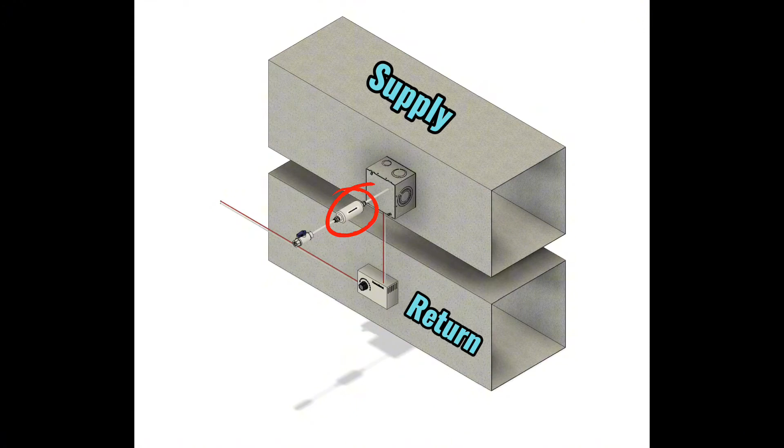You have your supply plenum here on top, your return plenum on the bottom, and this junction box houses a thermostat switch and a water solenoid valve, with the atomizing nozzle attached to that solenoid valve. On this water line we also have an inline water filter, generally a granular activated carbon type filter or a polyphosphate water conditioning filter, because you want to remove as much of the sediment and silt from the water that goes through that nozzle, since that nozzle has a very tiny orifice and can get clogged easily with calcium or mineral deposits.

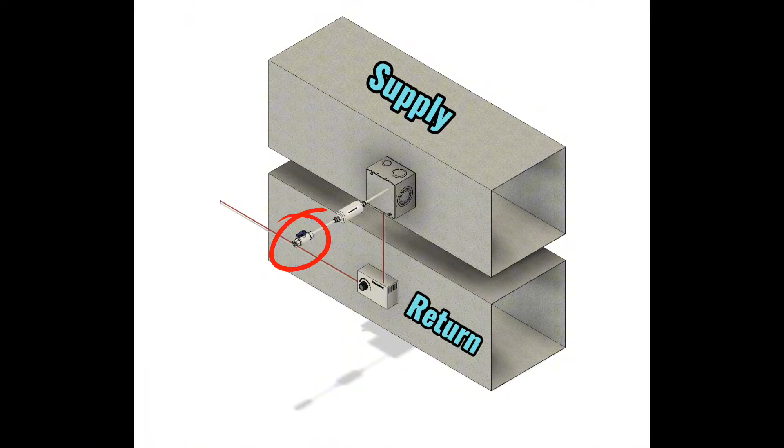There's also a water shutoff valve to ease servicing and repair. We have our humidistat mounted on the side of the return plenum down here, so you've got 24 volts coming into the humidistat.

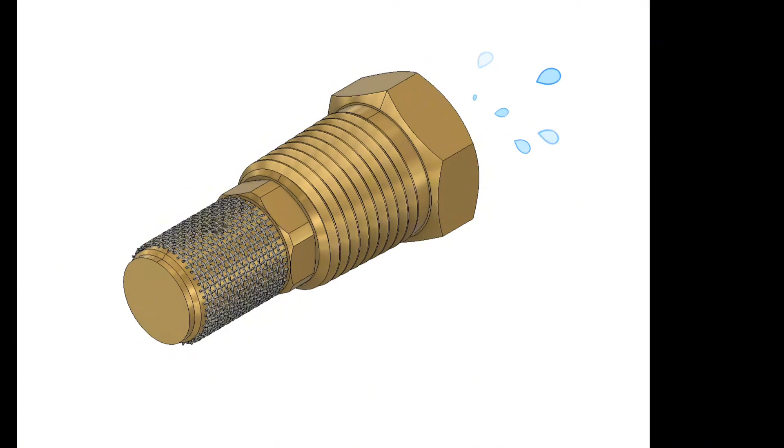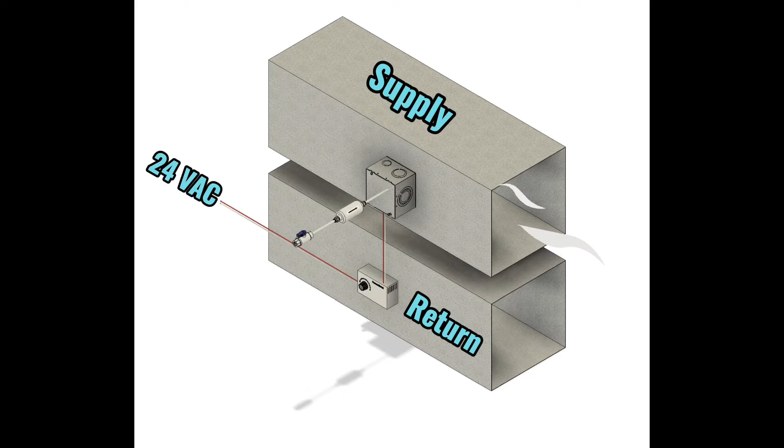If the humidity level in the building is low, the switch inside the humidistat will close and send 24 volts up into the junction box. And if you have warm air flowing through your supply plenum, meaning your furnace is running and up to temperature, then the thermostat switch will close and send 24 volts to the solenoid valve, allowing water to flow through that nozzle, dispersing a fine mist of water, or moisture, into the airstream inside your supply duct. And because it's warm air in that supply duct, that very fine mist of water basically evaporates into that airstream.

So you get warm, humidified air coming out of your supply registers in your building. The humidistat needs to be mounted somewhere inside the building envelope in the occupied space, or in this instance, it's mounted on the side of the return plenum.

That particular humidistat does not have a probe that sticks into the return plenum. It simply takes in the ambient air in the room and measures the humidity.

Some humidifiers will be controlled and attached, with wires attached to the circuit board inside your air handler or furnace, or as a standalone setup. Some of them operate on 24 volts, 120 volts.

So if we remove the cover from the junction box, we'll take a look around this model to give you a better idea of how it works. You can see the nozzle sticking inside the supply duct there.

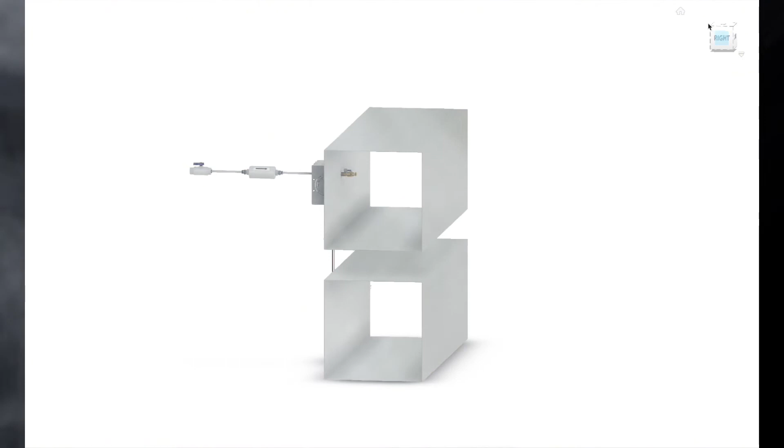And again, that nozzle has a very tiny orifice, which atomizes the water, which basically means you're just turning the big water droplets into a very fine mist, like fog.

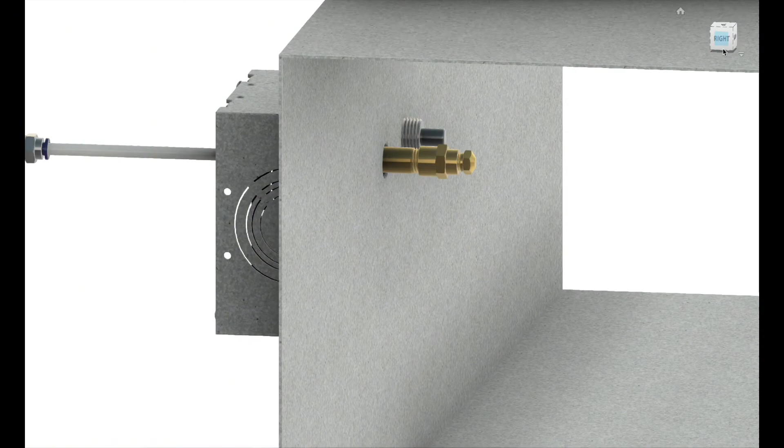And so that's the key. It's not a large amount of water, it's not big water droplets. It's a very small amount of water, and it's a very fine mist that it comes out as. And you can see the other side of that temperature switch there as well.

So this setup, you can buy these parts readily available online and build your own DIY atomizing humidifier, or you can buy these as a kit. There are several makes and models out there on the open market.

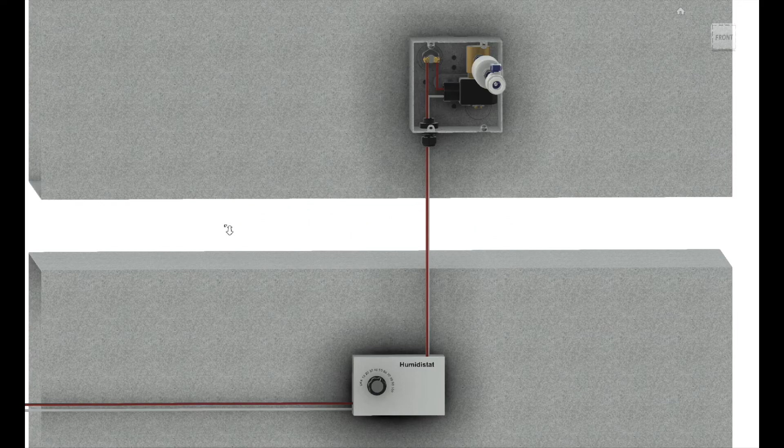So I'll try to zoom in a little closer here. Again, there's a humidistat on the bottom. See inside the junction box, that solenoid valve,

and that thermostat switch. So the thermostat switch, you can buy them where they will close the circuit at a preset temperature, so it's non-adjustable. Or you can also buy thermostat switches that are adjustable if you were going to do this project DIY.

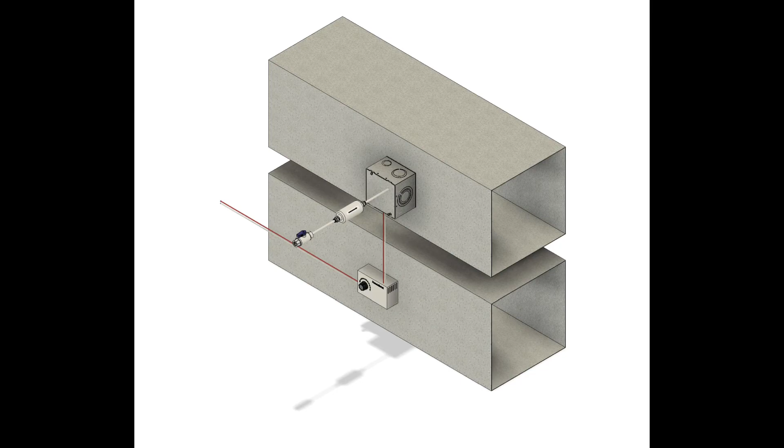So let's briefly talk maintenance. Atomizing humidifiers are fairly simple and easy as far as maintenance. You change the inline water filter once a year, or maybe every other year, depending on how hard your water is. Inspect and clean that nozzle and the little mesh screen, and turn the power and water off to the humidifier after heating season is over.

For example, do you want to connect your humidifier to your furnace control board? Do you want a standalone humidifier where you buy a step-down transformer that steps down the 120 volts to 24 volts? You get the idea. I hope this information helps you.